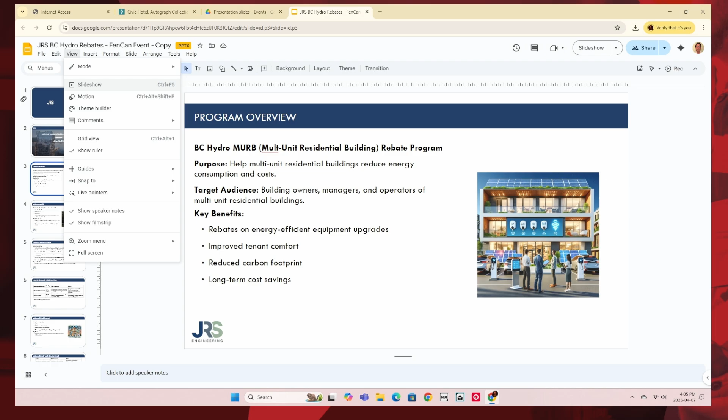Down arrow moves you through. Do you need a mic? Do I need a mic? You guys, can you hear him? Do I need a mic? It's a pretty small room, right?

A history lesson here. In my time at Centra Windows, I spent a lot of time networking with Hydro and Fortis, kind of on purpose. And I would encourage those of you in the room, if you don't like the rebate programs, get involved. Actually, it was something Joel, who I work with, taught me when I was very young in my career: if you don't like something, volunteer and fix it. It's the only way you're going to do it. If you sit back and listen, you just give feedback.

So BC Hydro and Fortis over the years would almost ask me to sit at the table with them to evaluate programs like this and give them feedback from an industry perspective. That sort of stopped, and I don't know if there's anybody doing that anymore. In fact, it's Tanya, right? Yeah, so from the Home Performance Stakeholders Committee - you just got HPSC, but the original was the Home Performance Stakeholders Committee.

Just to give everybody an understanding of how that came to be - there was a report written probably 15 years ago, and I was brought in to talk about, from a window perspective, what this program looked like. What we came out of it is that the industry was fragmented. You had HVAC doing one thing, insulation doing another thing, windows doing another thing, and everybody was independent and trying to get their own thing. We created this stakeholders group - we got 300 grand originally from Fortis to basically fund the creation of this thing. Fast forward to today, and we have this sort of industry.

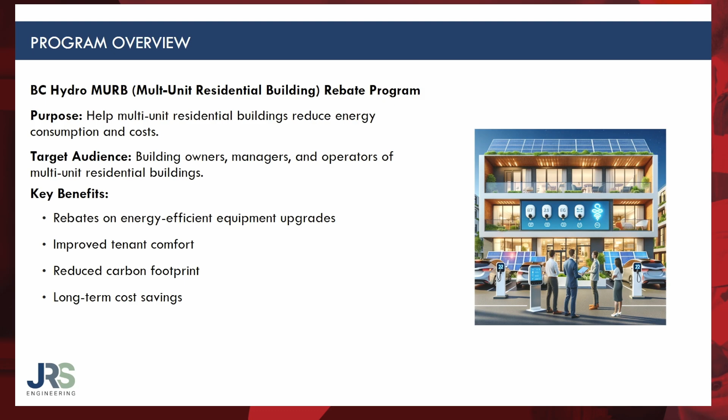It predominantly favors equipment upgrades, by the way, and electrical capacity evaluations. And then windows are in there for focusing on the envelope.

So apartments, condos, townhomes, 3 stories or higher with common area lighting, central. I think the whole concept of row homes is when you don't have any common areas, which is predominantly the townhomes that we do today. I'm not quite sure - I've never really run into a situation where we could determine up front whether a row home or a townhome would fall under the Clean BC program, which is a rebate per window, versus the MURB program, which is a rebate per square foot up to a maximum.

And like I said, electrically heated, natural gas, oil, or propane. So the idea is in a roundabout way to get equipment switching into buildings.

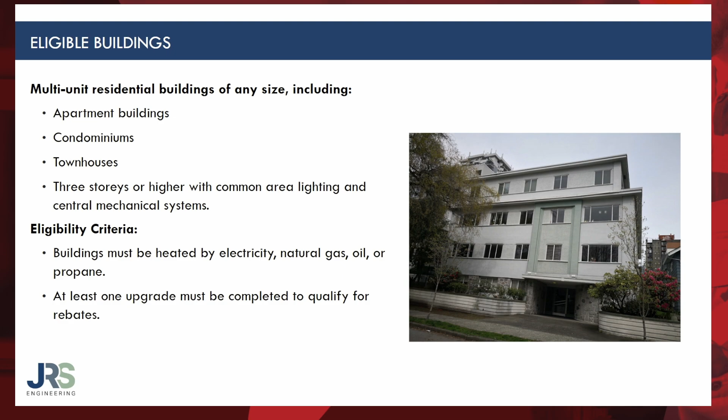So what's available? My understanding, and from what we've been told, $60 million is the budget that has been raised for this program. We don't know how much money has been spent to date. Projects are just starting to get approved for the assessment stage. I haven't heard of any projects getting approved for actually funding the renovation. So there's still a fair bit of money available.

The question I had for BC Hydro is how much is this money connected to the carbon tax, which is no longer in place? Because if there's no more carbon tax, what stream of funding is going to come into programs like this? So my understanding of the Clean BC programs, and maybe Tanya can answer this, is that program funded 100% by the carbon tax? And if the carbon tax is gone, what happens to that program? Will it have a sunset here? Or is that program funded by the utilities, which I believe are incentivized to convince people to use less of their utility? That's one of the sort of functions - I think they call it demand side management - the division of both Fortis and BC Hydro that goes into it.

So it's all about getting buildings to reduce their actual energy consumption, which is, in my perspective, a good thing. Because, I'm not sure if those of you remember, there was an electrical upgrade that needed to go to Victoria, and there were these overhead power lines that went through Tsawwassen. It's probably 15 years ago. They had to go from wood poles, small little poles, to these big steel structures. And all the houses that flanked them were going to lose their property value. BC Hydro, I believe, had to buy all the properties because their property values tanked.

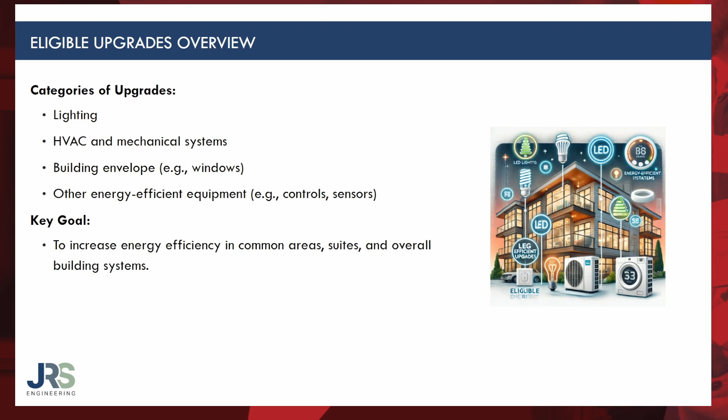So this is a bit of a breakdown of the items that are on the list. Lighting upgrades, electrical capacity upgrades, $130 per ton of saving of greenhouse gas savings. This is one where you're starting to see buildings look at what's the electrical capacity needed for a building as we start looking at adding heat pumps and electrical car chargers.

So I think the main motivation of this program is to start collecting data on multifamily buildings to determine what type of electrical capacity we need. There's a building, for example, a new construction project I'm involved with, where there's limited electrical capacity on site, so they need to use gas for heating. And there's a problem with that because there's a greenhouse gas cap on how much natural gas can be burnt to heat the building. So what's their design solution?

Anybody want to take a guess? High heat gain glass. So it's an interesting project because there's not enough electricity on the site. And this is something that people are starting to raise the alarm bells about, going, if we're switching everything from gas to electricity, how do we do that? And this program is going to start collecting a lot of data. But I can tell you, through the way energy advisors are doing a lot of calculations, the only way I've seen it done is high heat gain glass. Because you can have electricity for cooling in the summer, but the high heat gain glass offsets the amount of greenhouse gas consumption.

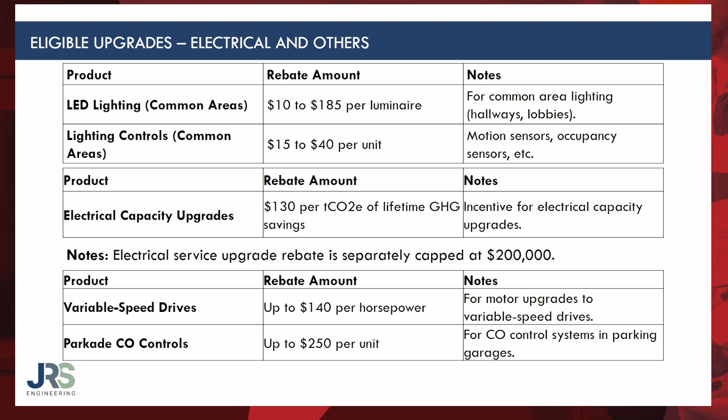The introduction of the zero carbon step code is going to trigger high solar heat gain glazing specs when you have gas heated buildings, just FYI. Certain things that don't seem consequential can start to pop up and become consequential. The whole idea of electrification is going to have an interesting impact, in my opinion, on glazing. In this feasibility study, we need to be paying attention to what energy advisors are going to be specifying for window retrofits and the high solar heat gain. I can assure you that unqualified energy advisors are going to be recommending probably a 0.40 solar heat gain coefficient on buildings that have gas heating, because there's a path in this program that will allow you to put new windows in on gas heated buildings.

There's a lot in here on heat pumps. I have very little experience in the world of heat pumps, so I'm not going to talk much about that.

Getting into the glazing side, if you went onto their website when the program first came out and downloaded the handbook, then deleted it and re-downloaded it, they had updated it but didn't change the version date, so it was very confusing. I remember when we first started having initial conversations, it just said high performance windows, and we were like, well, what is that? I think it might have said code minimum.

Well, it's now defined at a U-value of 1.53. There's no caps on high solar heat gain — don't know where the numbers come from. $30 a square foot for glazing was always the initial amount, but then they put a cap of $1,200 per rough opening. The other kicker is the existing glazing system must be single or double glazed with non-thermally broken frames. Some might ask, what do they mean by that — are they assuming anything that's not vinyl? The answer is no, non-thermally broken aluminum. They're basically assuming there's going to be limited funds available, so they're narrowing it down to the worst of the worst windows on the marketplace.

Now there are custom projects. If you look at the handbook, under the column for gas heated or fossil fuel heated buildings, there is zero window rebate. But we've been told, as an Alliance member, that for gas heated buildings, if you want to do windows and you can do a heating switch, you could potentially get a rebate for windows if you upgrade the heating system.

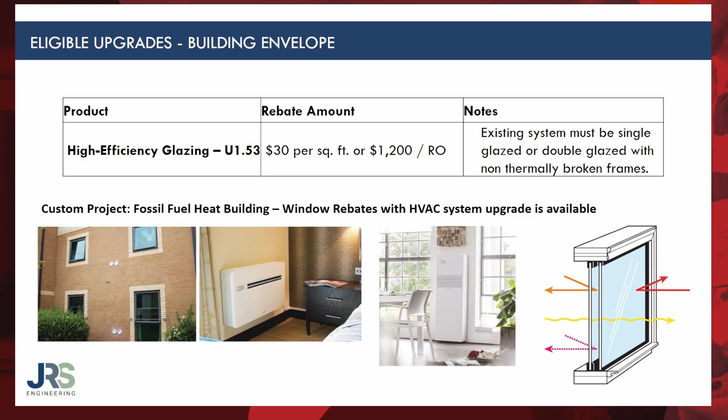Custom projects — if you were involved in a building doing a classic leaky condo retrofit where you're doing cladding, windows, siding, everything, you can get funds. There's a project we're involved with right now: it's about a $10 million building envelope rehabilitation. We basically proposed it to the program, and there's $500,000 worth of funds available to help the strata. So it's something to bring up.

I don't see the program being an obstacle to slowing things down so much. The approval process of the BC Hydro program is faster than the building permit process, so it shouldn't be too much of an issue.

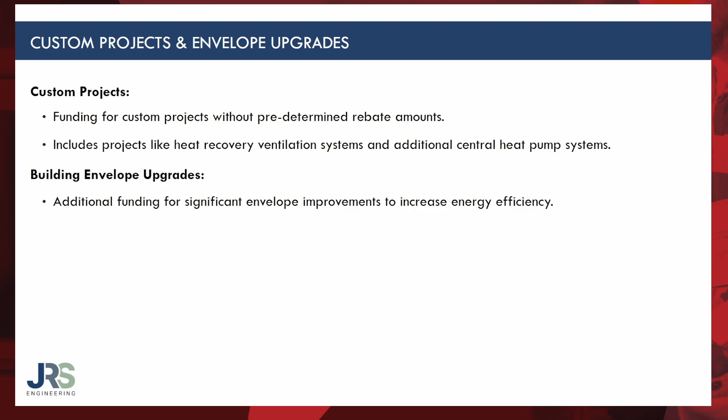So the application process - this is something a strata can do on their own, or they can go through the Alliance professional. My only shameless plug is we can do that for any of your clients. It streamlines the process a little bit. We need a couple documents, go through it, and they get approved for every step. So it's not like the Clean BC program where you do all the work and then file for the rebate and hope you qualify. You're not committing to it exactly as we go.

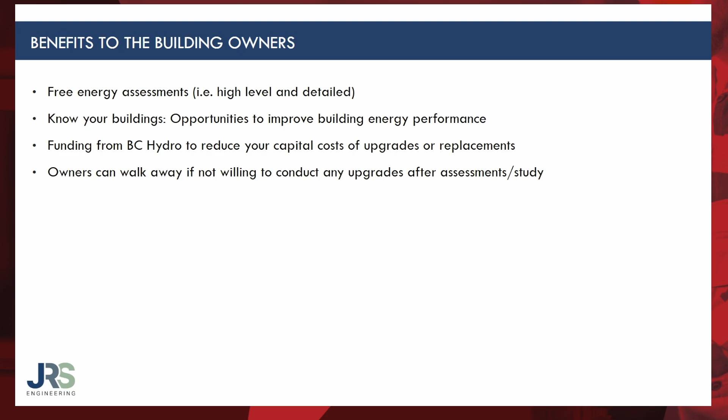So, free assessments - I have not seen a single strata turn one down yet. It allows you to know the building, funding from BC Hydro, and the owners can walk away. This is, I think, key - you don't have to do the renovation. This is why I think there's motivation to do the assessments, to get an understanding of what these buildings are doing. So there's no obligation to do the work after the assessment, which is a benefit.

So that's basically it. I was hoping BC Hydro would be here to answer some direct questions, but the reality is - you said there was a 1.53 U-value, but was that in a specific type of project, or is that the number across the board? That's the value of the replacement windows. So whatever you choose to do, that's the number. I tried to ask where that number came from, and I got no answer.

So it's an interesting program. You can go right to the top and I don't know who came up with the program, how it was designed, what its intent is. It just sort of landed on our desk, and that's it.

Another key factor is, as a supplier contractor, you need to be qualified under the Alliance program to do the work. So what's the program called again? We have a different program for single family. But I think you're speaking to the line - yeah, it's the same. If you've done it for single family, you'll qualify for the multifamily program.

So did you get any indication of the activity of the window retrofits? Are we seeing projects getting done? None have reached that stage yet that I've seen - it's just the timing, since this program was announced in the fall, November. By the time a strata shows interest, hires someone, does the application - we have one customer who owns maybe 5 or 6 rental buildings. He's just started the process for all of his buildings to get them all assessed. Some are looking at it as part of a depreciation report process - if you've got a depreciation report on your building and windows are on the list.

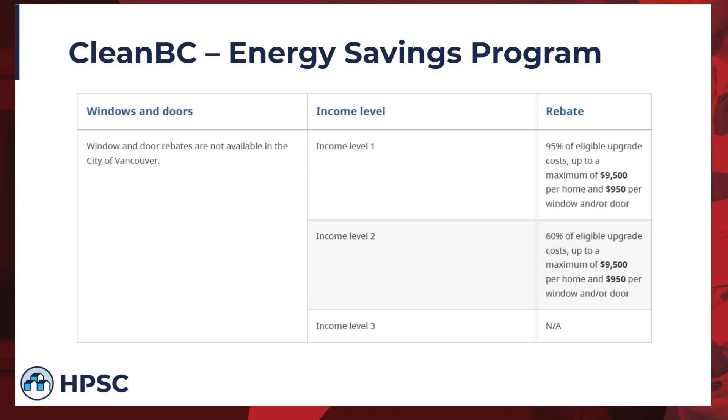Our commitment is always to advocate and keep our network as informed as possible. We've heard there are upcoming program changes - it doesn't sound like bad news, just changes, and change can be frustrating sometimes, but we'll do our best to get that information out quickly. I'll have my contact information at the end. If your work overlaps with us, I strongly recommend you get connected - we have a newsletter, you could reach out if you're interested in joining a sector council, and these are great ways to stay involved.

This qualifications process, well actually the whole process, but specifically the training, was designed and developed by our Window and Door Sector Council. So this wasn't me and my colleagues sitting down saying, what do I think these window and door folks should take? It was the sector councils coming together and discussing and debating, mostly agreeing.

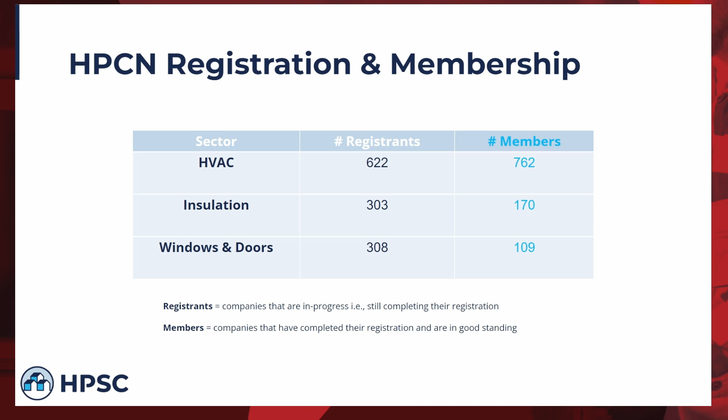Just wanted to share a few numbers about our capacity in the HPCN. This is a question that typically comes up. I've told you about our network, why it exists, what the benefits are, how you can join, and then typically some questions will start coming in like, well, what's the size of this thing? So we do put all of our sectors on screen just so you can get a sense of the breakdown.

And of course, I've also highlighted windows and doors specifically for our meeting here today. So on the far right-hand side, that's the number of members that we have for each sector. Again, those are companies, and each company could have more than one individual trained installer. We also put the number of registrants in the middle. We just like to highlight the fact that our contractor network is always growing as well. So you might notice right away that windows and doors has the lowest number.

That can definitely be chalked up to the fact that there are more HVAC rebate programs, and generally they have higher incentive amounts, so we have always had really high participation in the HVAC sector. Insulation is actually not too far off from windows and doors. That's probably a reflection of there being more insulation rebate programs than windows and doors, but their values are also a bit lower.

So you could look at this a few different ways. Why is participation so low? But we have also looked at this as an opportunity to talk with our program partners about requiring some of their other window rebate programs to require HPCN membership, because basically these numbers are being strongly driven by that one energy savings program.

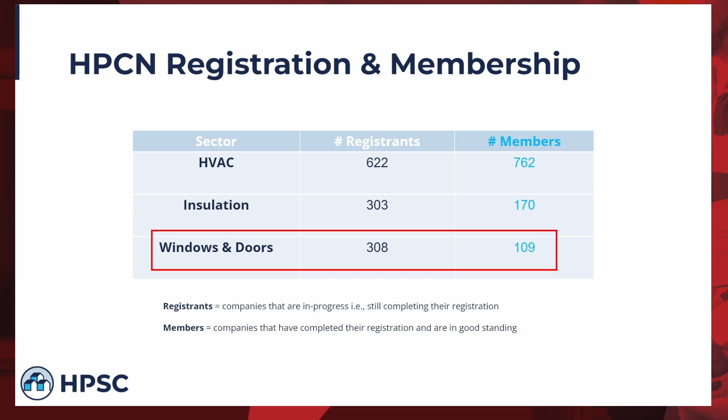The Lower Mainland's a little bit slow. And again, we've seen much higher growth in our HVAC sector, where they have more rebate programs that require our membership, so we definitely see rebate program membership as a big driver. Of course, we're also continuing to explore other benefits and drivers. Some of the changes we're going to be making to our search tool and how we can promote businesses, I think that's really going to help.

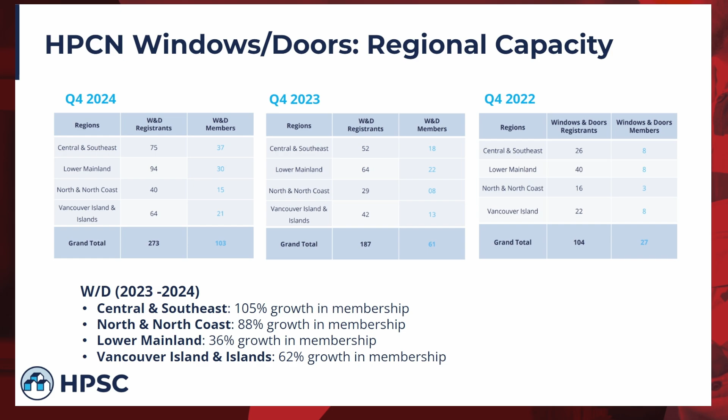All right, quickly I will also dive into a little bit about what we call contractor management. This is our quality assurance protocols and commitment. Aside from just creating a network of contractors who have taken training, which is fantastic and a great step, a lot of contractors usually want to know, what are you actually doing to investigate them? How do you know that they're following through on your training?

Well, as a reminder, we work very closely with the rebate program partners, and they actually conduct project-specific site visits. It's a random percentage of all the rebate applications, typically around 10%, but it depends exactly where it is. If they have concerns about a particular contractor, they might do multiple site inspections for those folks. So the rebate program partners are already doing that sort of hands-on site inspection.

Our focus is on the long-term quality assurance and workmanship of the contractors in our network. So overall we're trying to monitor, are they doing quality work? Are they following the training they went through in our network? Are they committed to our code of conduct, which was created by our sector councils - pretty standard things, like you must be an ethical business person, put customer service first, and give them the benefit of rebates and things like that.

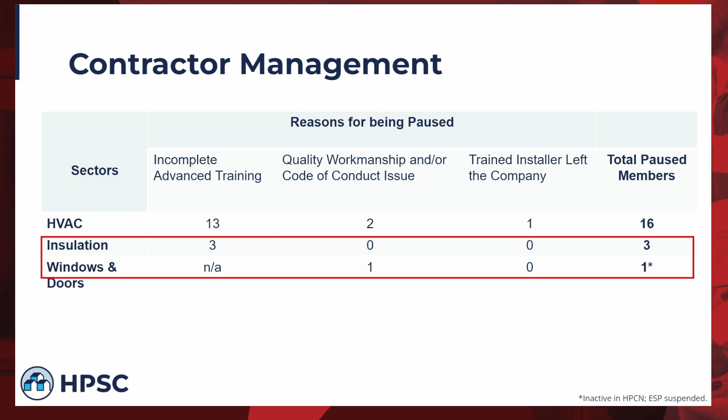Then we will go to what we call a suspension, and that's a punitive measure, a slap on the hand. You have now been locked out of membership. You still have to retake this training or do XYZ, but even if you did it tomorrow, you are still suspended until this date in the future as that punitive measure. And then it would kind of escalate from there.

In terms of the types of issues we see with windows and doors, it's pretty straightforward. If it's a quality workmanship issue, we're just consistently seeing them not following the training, not following the best practice guide, doing a really improper job of insulating around the windows. Usually what we find in that case is it wasn't a trained installer on site, so that's a great opportunity for us to catch a company that needs more of their employees trained.

I hope you're not talking about insulation in the rough opening around the window. That's counterproductive and non-code conforming. We had a long conversation, the advanced techniques about that. I feel like we lost that battle. But stay tuned tomorrow and I'll show you what goes on in the rough opening, and then you tell me if you want to stick anything. Like I said, I'm not the technical expert. We follow our best practices training.

Spray foam is an option in the best practice. But that's not insulation. The spray foam used there has no R value, it's not defined as insulation, and there's no accommodation till 2025 for even half pound open cell. It's a different thing, an air tightness strategy, just like using rod and caulk at best, and it's questionable if it works. In the best practice guide they talk about putting insulation in the rough opening cavity, and we had conversations and suggested, at least from our side, don't do that. Well, that's great feedback for me.

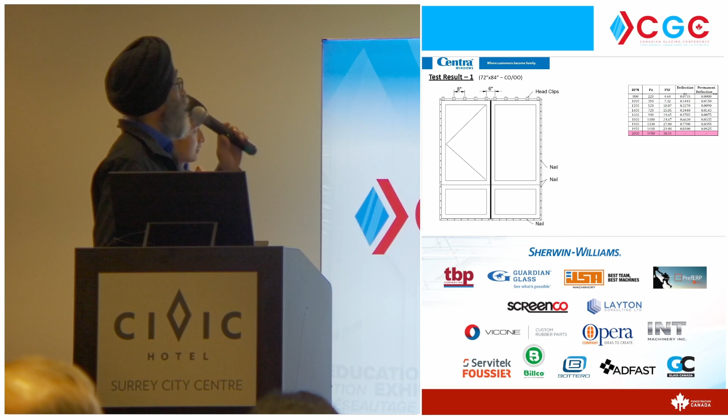So let's dive into the results. We tested a 6 foot by 7 foot casement fixed-over-fixed window. The dark line is the steel in the coupled mullion, and the horizontal mullion did not have steel. So our main weight transfer is going from top to bottom.

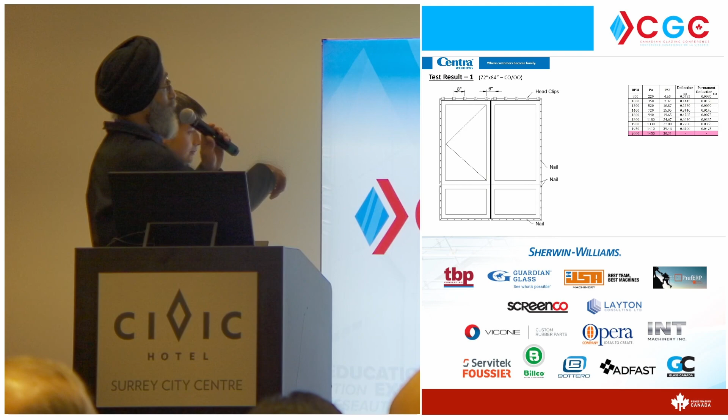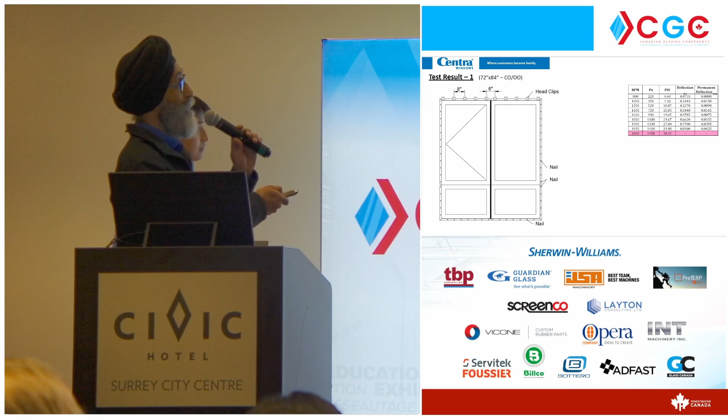The table on the side—because our test wall is not controlled by the pressure, we have to control the RPM, which gives us the PSF of pressure, then the deflection, and then the residual deflection. The red is the point at which the connection failed. So that is what we saw.

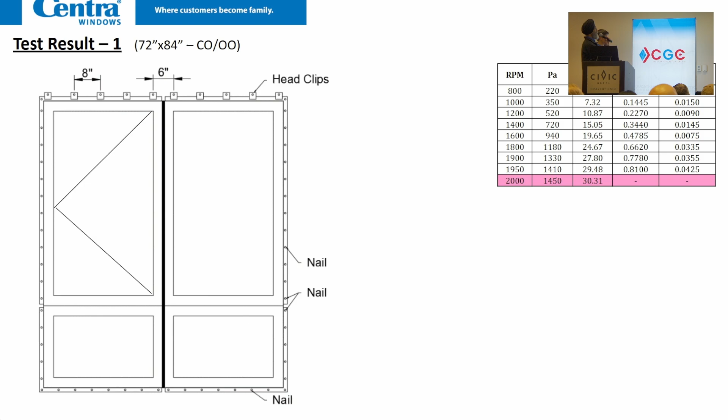It is nail attachment on the side, nails every nail hole, and then head clips 8 inches apart, 6 inches at the mullion. This is how the attachment was. We made a complete test buck, just like a construction wall would be. This is our structural testing test wall in-house.

So this is how the window looked once it is attached—the nail flange, the head clips with 3/8 deflection allowance, which they're supposed to take, which determines how much the bending moment will be once the wind load is applied.

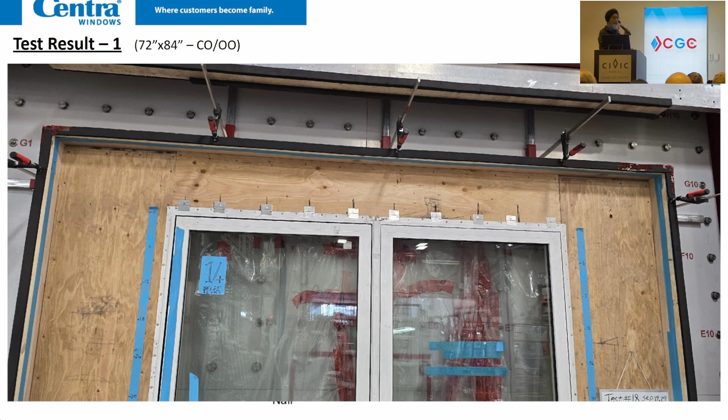So when we applied the pressure at 30 PSF, this is what we saw: head clips failing in bending, and the ones at the center disengaged. As you can expect, because head clips are flexible in that they bend before they disengage, the other ones stayed engaged and the load got distributed further apart.

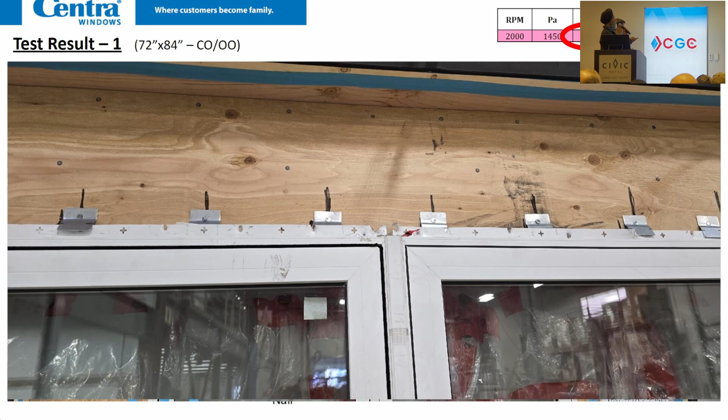But the definition of failure is also very interesting. Is the head clip considered failed as soon as it bends, or when the nail flange disengages? That is still up for debate, but we are considering failure as when it is disengaged—when the nail flange has bent, the head clip has bent to the point that they have disengaged and come back.

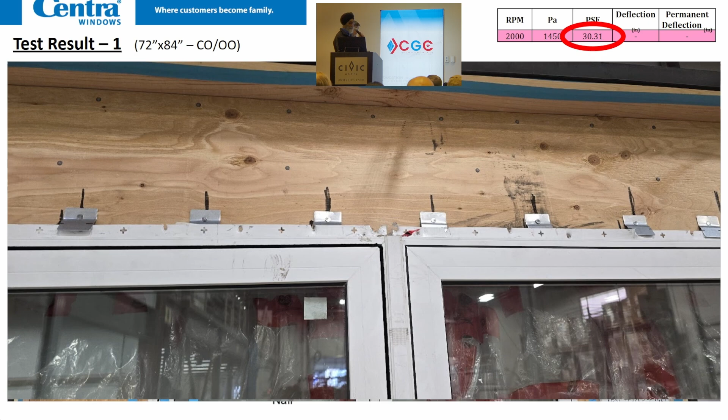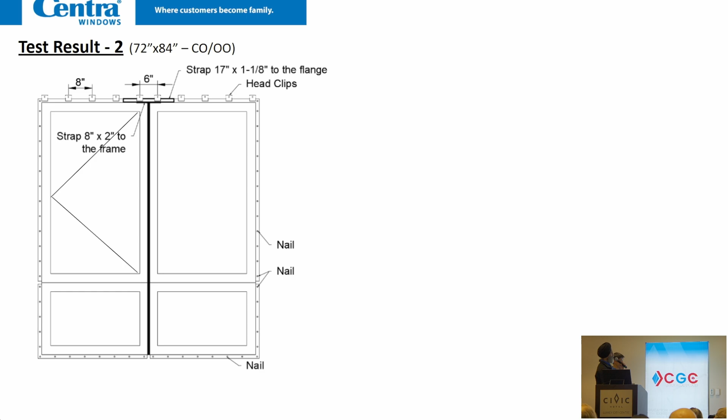Then we said, okay, maybe the connection—because it's a coupled window—the nail flange is too flexible. So we put a strap to connect it to make sure it's like a continuous nail flange. This is how it looked. We put a sheet metal and screws every 3 inches to make sure this connection is continuous. And even on the frame itself, we put a metal plate to connect it through, to make sure this is like a continuous window now.

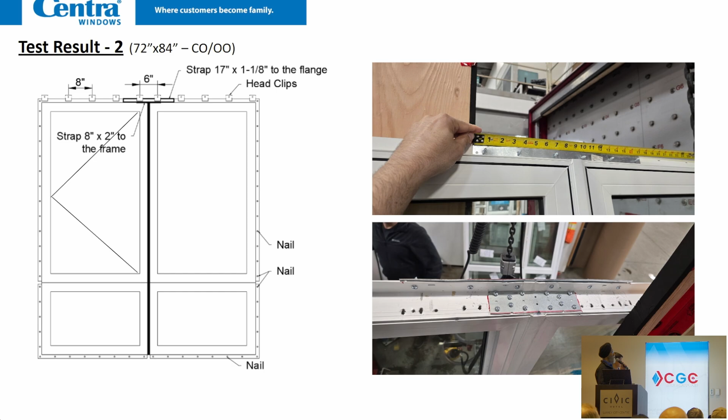So let's see what difference it makes. Attachment, same. Failure at 33 PSF, disengagement, the same. Minor improvement—you can see from 30 to 33 PSF.

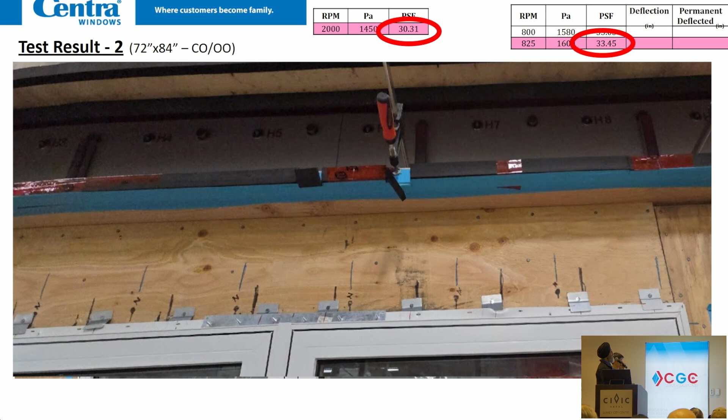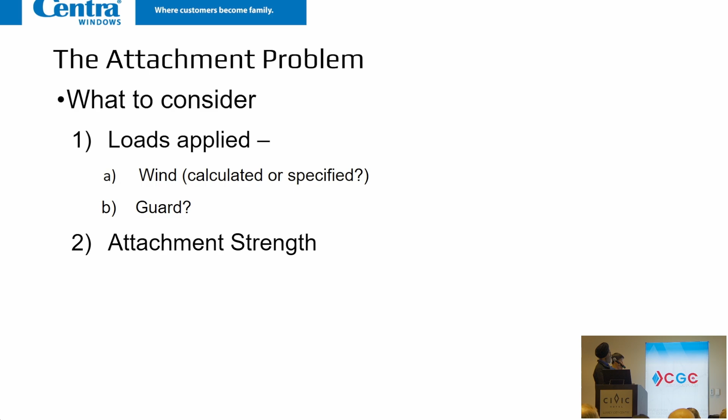Now, in terms of the attachment, as engineers, we are interested in what to consider. The loads that are generally applied, all of us generally understand—wind load, everybody applies. Guard load, we do apply guard load when we consider glass strength, because we say point load or infill guard load, everybody applies. But do they apply for the attachment? I haven't seen a consensus about that in the industry.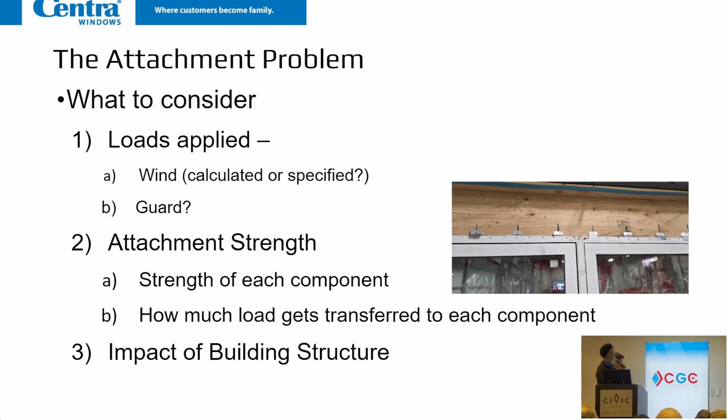Attachment strength—strength of each component is important, but also how much load gets to that one fastener is important. Last but not least is the building structure. Wakey will cover that part, why that's important, because buildings are not being built the way they were built before. And especially when they're not meeting the architectural drawings, that is very interesting on new construction as well.

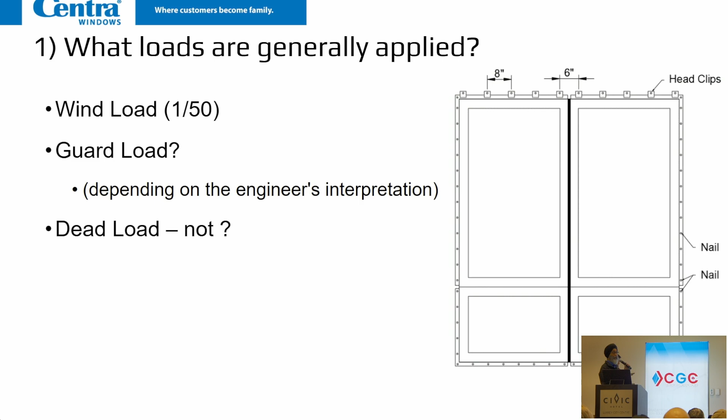So what loads are generally applied? We see that wind load is generally applied across the entire perimeter or the entire surface area. Guard load, depending on engineers' interpretation, they may or may not apply it. Dead load of the window—nobody is applying it for the fastener connection, especially not the head, because it's not relevant. But I've seen some windows where it's not level, square, plumb, and the fasteners there can have a dead load impact, but generally they are not considered. Seismic, nobody considers for the attachment, but should they be? I don't know—I'm not here giving a design guideline, I'm just prompting questions.

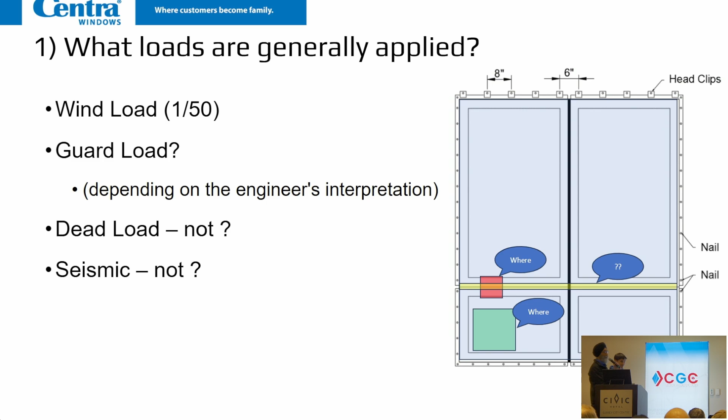In terms of the guard load, generally it can be a line load or a point load. But the impact of those—if you consider guard load, where should that be? Should it be all on each end, as if the entire load is being taken by one side, or should it be split half and half? I don't know, something to think about. Infill guard load—do you just apply it here on the entire sill, or consider that 12 inches and apply it for every single section to see what is your worst case scenario? When I talk about this to our PMs, their eyes are going like this—they're like, stop talking, this is a nightmare.

So attachment strength—I guess I'll pass to Wakey on this. Yeah, so to analyze the attachment strength, basically our thought process was first we look at each component in isolation, and that's the fastener, substrate, nail flange, headclip, etc. Since we're focusing on headclips today, let's just look at how it works.

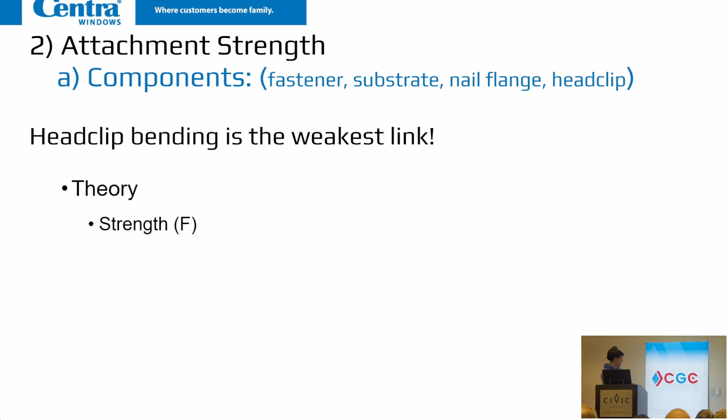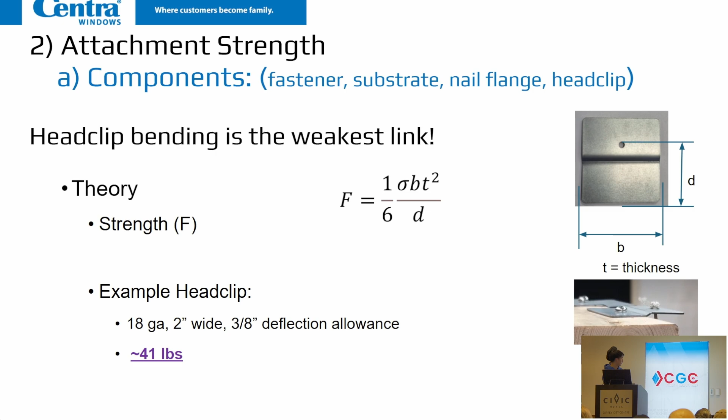Basically we isolated the strength. We used the bending formula, and isolated the strength F there. That allows us to see if we modify certain characteristics of the headclip, how that affects the strength. So with our typical headclip and attachment, we found that headclip bending was typically the weakest part of the attachment, although other failure modes should still be considered. For an example headclip with those characteristics, we estimated an approximate strength of 41 pounds, and we did measure it experimentally and found it was in the same order of magnitude.

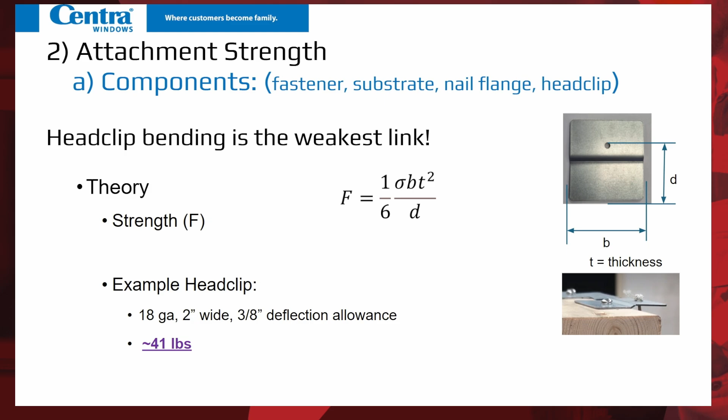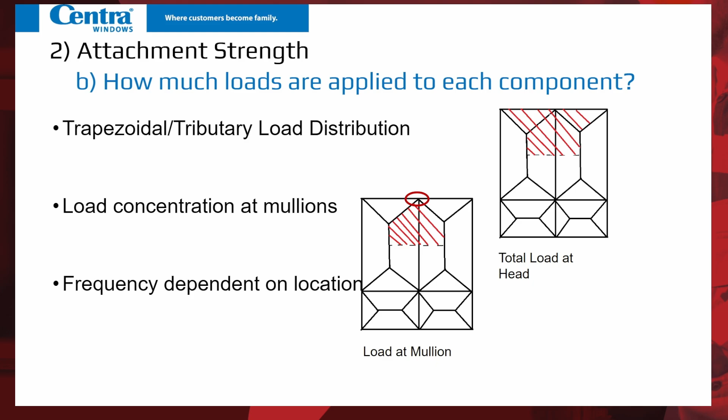Next, we examined how the loads are distributed to each component. Most people are familiar with the trapezoidal load distribution, and you can see here this is the amount of load that would be distributed to the head. Next, we looked at load concentration at mullions—this is the amount of load you can expect to be transferred to this point, carried by the mullion. You can either handle the load concentrated there by having separate frequencies dependent on location, or you can just generally increase the number of headclips overall. Most people typically go with a higher general frequency overall.

And although we can come up with a model to describe what's happening, we really wanted to physically validate our model. And that's what we were doing when we showed you our experiments.

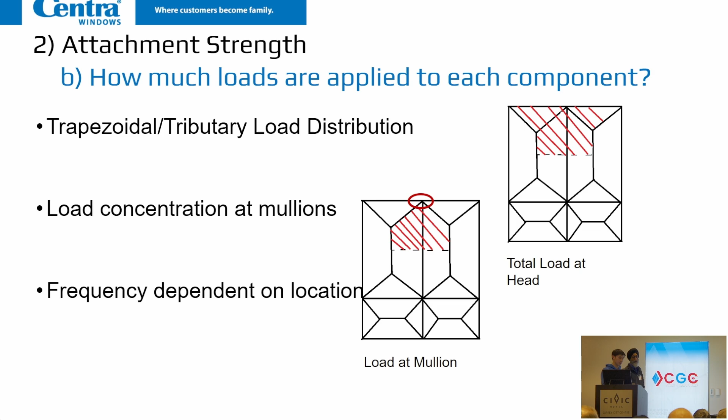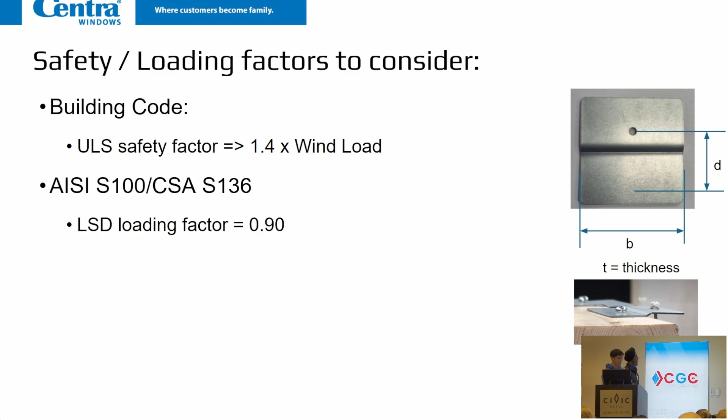Next, we examined the loading factors we needed to consider. In the building code, the ultimate limit state factor is 1.4 for wind load. Then CSA S136, the standard for steel head clips, has a limit state design loading factor of 0.9. Compounding the two, we found an overall safety factor of 1.56. If you need to account for unknowns, you might want to have a discretionary safety factor.

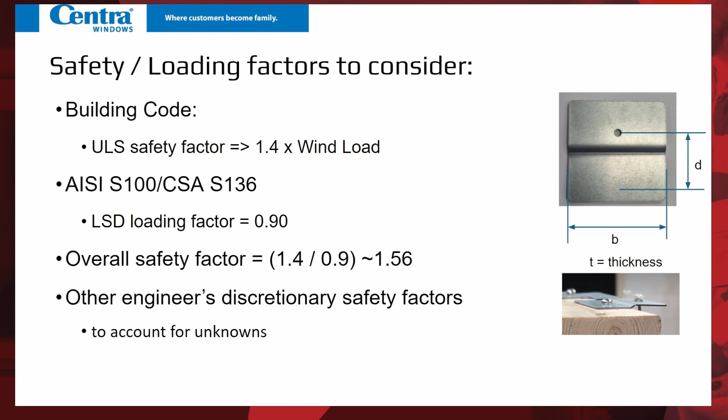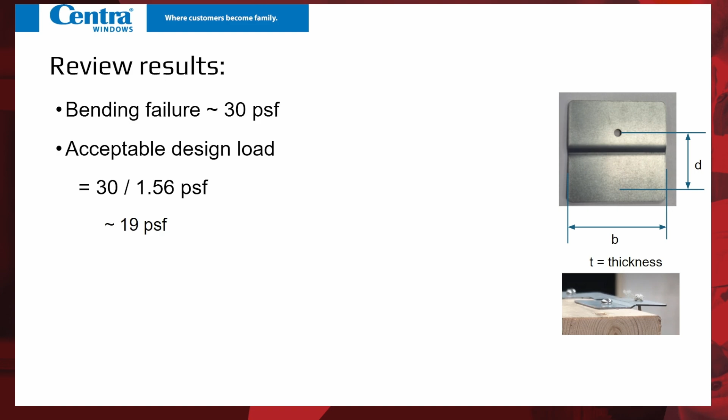Looking at the results, our failure occurred roughly at 30 PSF. We divide that by 1.56 and got around 19 PSF. Since this is NAFS, we round down to the nearest 5 PSF, so that setup only really qualified for PG-15. That may surprise you or it may not. This was for full disengagement as opposed to yield, which many engineers would have considered the failure.

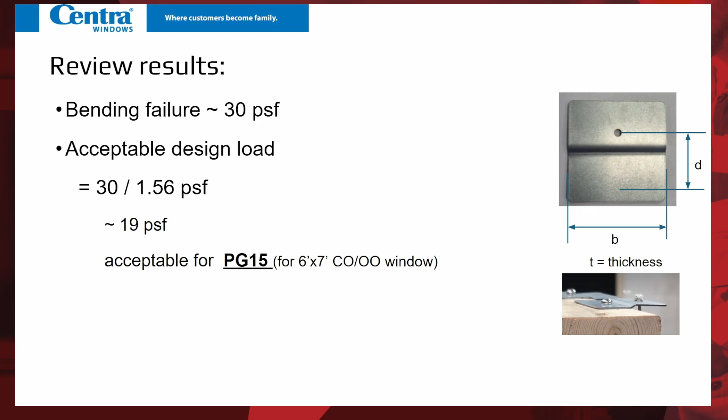When we talk about substrate, a lot of the time we've been seeing that there's only one hit stud, and it's not unusual in those cases for the nails to not be attached to a stud. In fact, we've seen some architects' drawings showing the nails not going into a stud. In this case, even though head clip bending is usually the worst case, that would obviously not be true if it's not installed to a solid substrate.

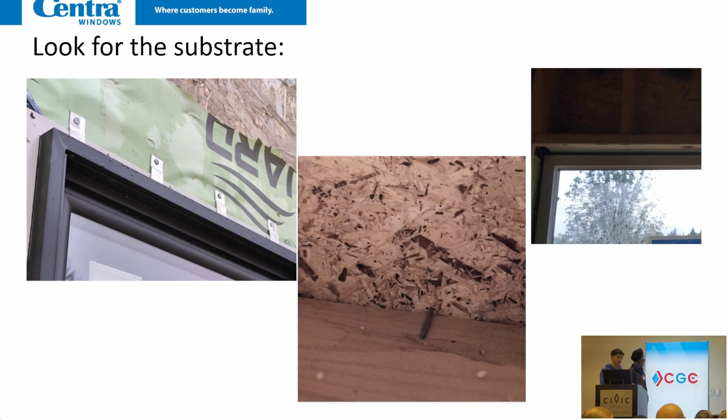Given what we've talked about today, do you think the head clip should be limited to certain building types or wind loads? Or how we may want to modify them to suit different applications?

So we came to this formula previously. As you can see, if you double the width, you can double the strength of your head clips. Whereas for the same material, if you double the thickness, that increases your strength by 4 times. So note that as you increase the bending strength of the head clip, other failure modes that weren't critical previously may now become critical. So the loads that we apply should also be considered very important.

And what alternatives can we consider? We've already talked about the ones we've seen: the slotted angle, the strap anchors, etc.

As Terry has said, we've seen across Canada that a lot of people don't use head clips. In fact, in several jurisdictions, they simply use nails in nail flanges and somehow they're fine with it. So what are your guys' opinions about this? Well, let me pose - am I on?

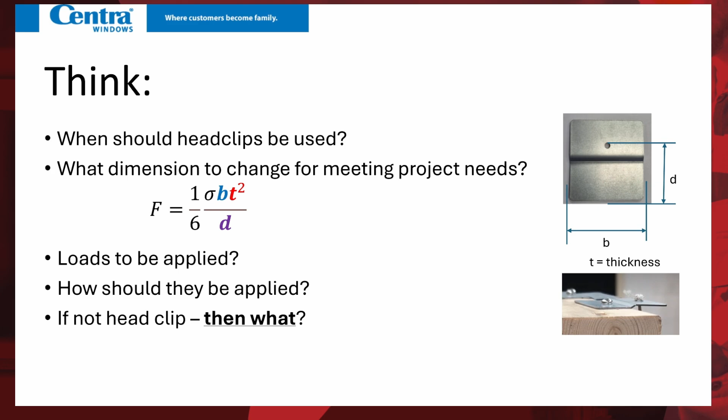But let's think this through in the Part 9 context. Part 9 has an installation requirement that's referenced, saying you must install in accordance with the manufacturer's installation requirements. I don't want to name names, but there's a few window manufacturers whose insurers are pretty hesitant to suggest they should get into the business of providing installation instructions, because it's not like you make a ton of money off it if you're supply only, but you gain all of the liability. But if it needs to be installed generally in conformance with the way it was intended to be installed in the field, are you not kind of admitting that you have an installation provision?

So in the fullness of time, if we do see failure, I can hear that argument. I do a lot of work as an expert in the Supreme Court. That'd be a pretty tough thing to fight if you tried to plead we don't have installation instructions, go figure it out on your own.

Just the installation instructions, points of attachment, or everything that goes after? Well, I mean, it's just generic. It says you have to test it under NAFS in general conformance with the intended method for installation.

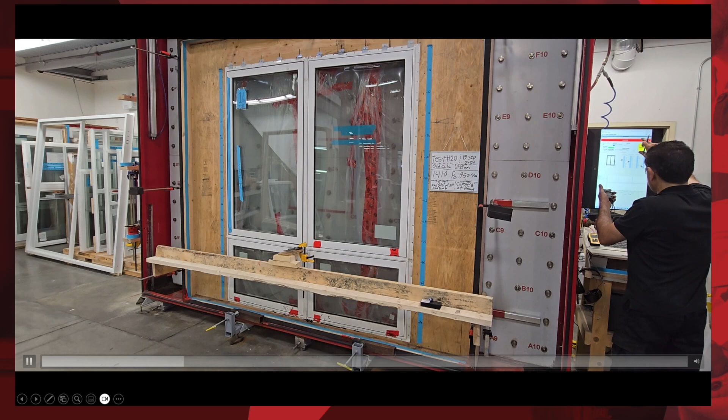But those details came to fruition in 92, 93, because I was not satisfied with just screwing railings down. I had all of those take-aparts that showed teardrops of decay. My bigger concern there was we can't have the fasteners on the horizontal surface.

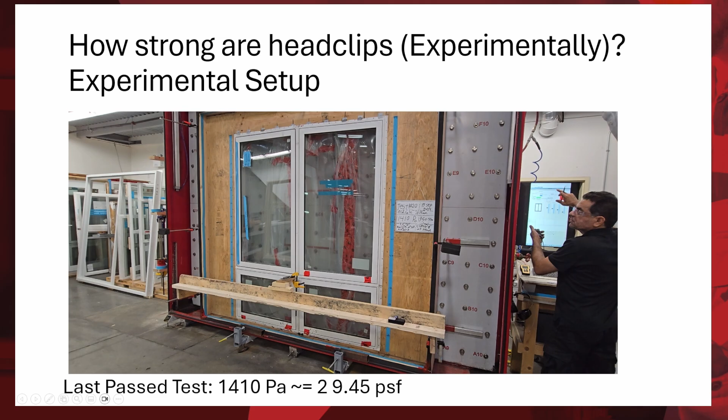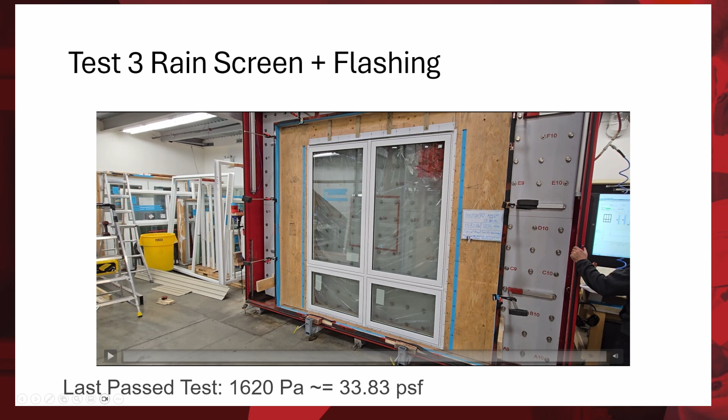So this is the first one we were showing with just the head clips. You can see at the top - basically the second one's the same - with the one we were showing. It occurred at a very similar PG rating, and this one with the rain screen, basically you can see the flashing and the rain screen. It doesn't look like much right now.

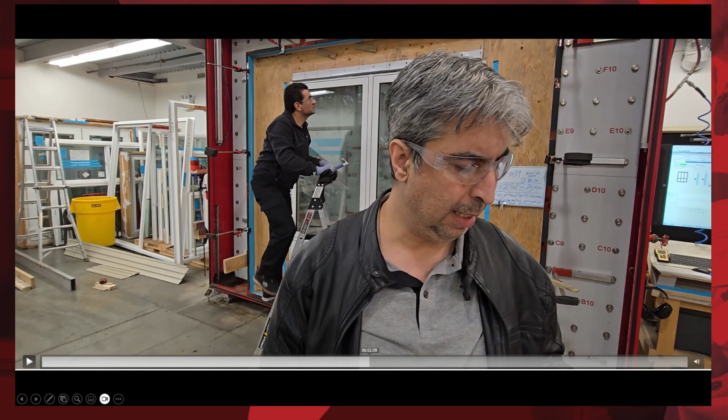And even when it fails, it doesn't even look like anything happened. But if we basically drag - if we remove everything, we will see we have a failure.

Can you just use a pointer to show the head clips that are disengaged? Yeah, you can see here - and here it's still over the flange, and here it's underneath the nail flange. So you can see it's already failed. And that happened.

So you can see from the start, from the first one to the third one, there was only a 4 PSF difference. So the claim that having rain screen and flashing will help - you can see that really that made little difference.

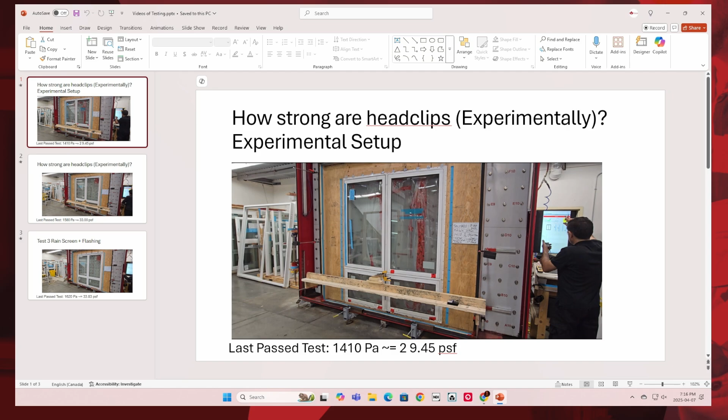The engineers will tell you story drift limit states are, arguably - and I'll bring some references for that - 1 in 500. But you take 118 inches of a Part 9 wall and put that deflection on there, that thing is expected to be cycling for sure a quarter of an inch, and it all happens in the middle band of the wall. So you ask me about wind, it's a bear, because where's the limit state? If I were an engineer with a seal on stuff, I would definitely want to have a hard limit state and reread the standard of practice for my association before digging in on that, because at least you're protected by the limit state arguments.

Otherwise, we couldn't do anything. But your question's germane. Well, I don't have experience in big buildings and tall buildings. At 30 stories on the leeward side, what are those negative pressures? Or at the corners, are they sort of sustained too?

When you really get those big and you look at membrane failures on roofs, you'll see they just go into a standing limit. So the dynamics and the vortex are fairly constant, so you don't get that cyclical effect. But you want to take a nail out, right? What's more problematic, that constant ratcheting or one event? But your testing here was one load cycle, right?

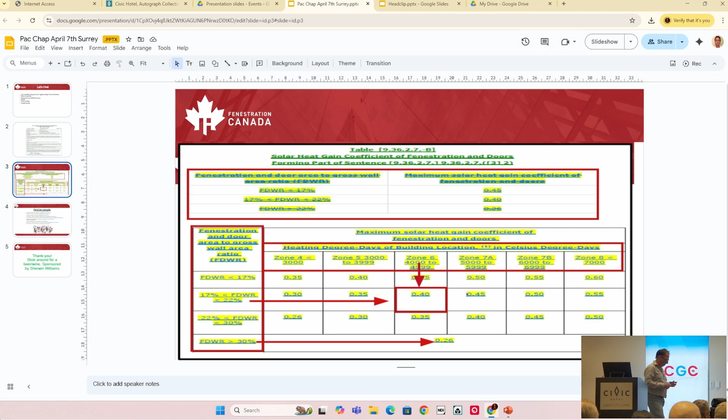Very kindly pointed out we're at our period. Yeah, we aren't. Yeah, fair enough. But yeah, but you better be ready.

That's okay, I'm going to share it anyway. So this is the original table that was in the proposal for 2025, and you can see that it had 17% window to wall, 22%, and more than 22%. And there was your solar heat gain numbers.

The guys at AVFQ did a lot of research, and they came back and provided this table for proposal. This now takes into account greater window to wall ratio and values. It's based on zones, which makes perfect sense, with different solar heat gain limits. You can see 0.26 covers everybody once you get to greater than 30%.

So is it going to come into play nationally? Probably, I mean that's kind of my assumption. But BC has not yet said whether or not they're going to buy into this. So we don't know if it's going to come to BC.

Next one, general comment though. The Codes Reconciliation Agreement in 2020, everybody has to harmonize. Good luck. Signed up by all the provinces and territories, and the 2025 national is committed to being a 2025 national. So you can expect the latest date that you'll see that officially published should be December 31st.

Yeah, okay, for sure. Which means we're dark until then, but all of the provinces and territories, point one, are committed to 18 months for adoption. A lot of this stuff, I'll bet you a beer on it, Murray.